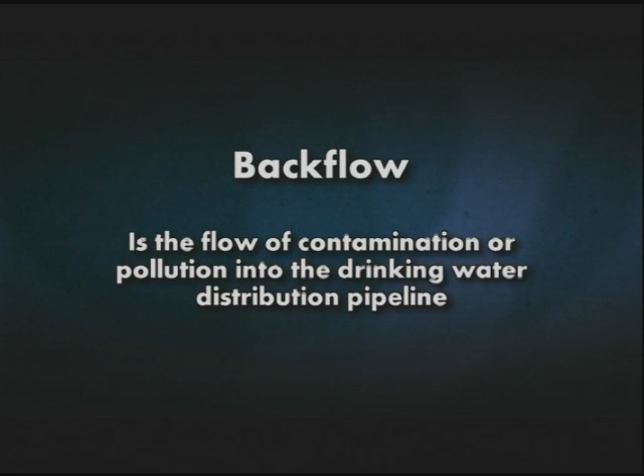Backflow is the flow of contamination or pollution into the drinking water distribution pipeline. Backflow can be caused by backsiphonage or back pressure.

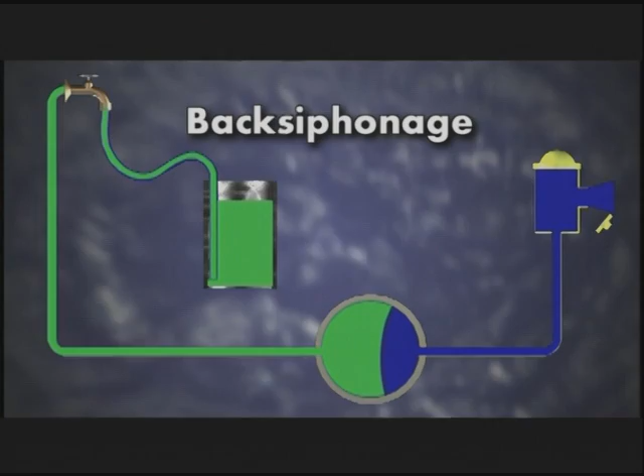Backsiphonage is caused by negative or reduced pressure in a water system and occurs during low-pressure events such as a line leak. Back pressure is caused when a potable water system is connected to a non-potable supply operating under higher pressure that pushes contaminated liquid back into the public water system.

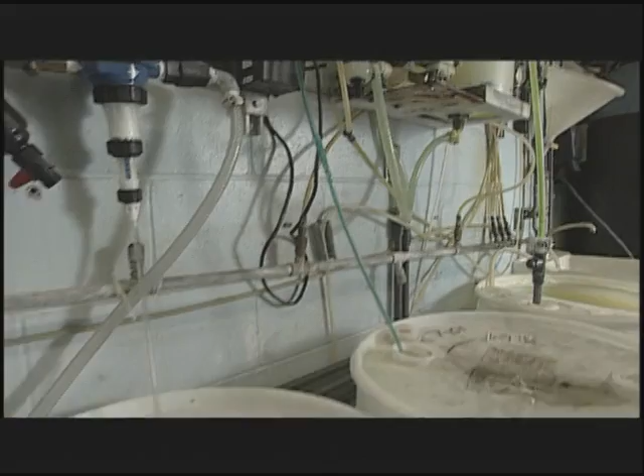This means that non-drinkable water or other fluids can accidentally get into your drinking water system. This occurs when there is a difference in pressure that forces the unwanted liquids into clean drinking water lines.

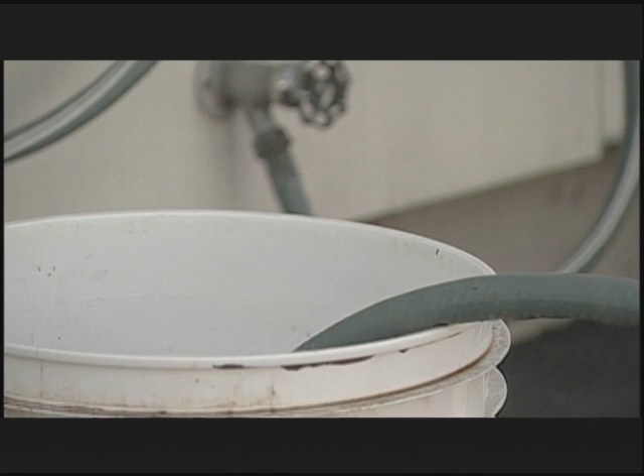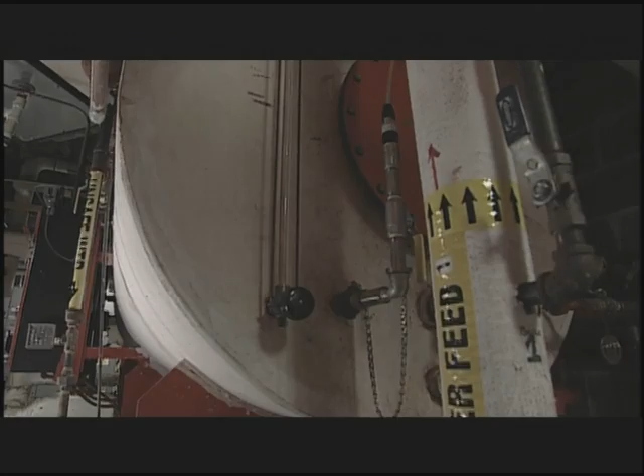Cross-connection, which is any actual or potential connection between the public water supply and a source of contamination or pollution, can occur at any connection location: residential, commercial, industrial, and agricultural. The public should be aware of the physical interconnections between the drinking water plumbing and potential contaminants. Let's look at some examples of how this might occur.

The employee at the car wash connects a 2-inch hose as a stopgap until the pump could be fixed. The pump was quickly repaired and turned on, but they forgot to disconnect the temporary hose. The pump forced the contents of the 2 reclaimed tanks, 850 gallons, into the drinking water main.

It didn't take long before a car wash employee noticed brown soapy water in the restroom. The cross-connected 2-inch hose was immediately removed, but not before contaminating an 8-block area. The water mains were flushed and chlorinated by the water department. A reduced pressure principle backflow prevention device was ordered installed on the water service pipe to provide premise isolation.

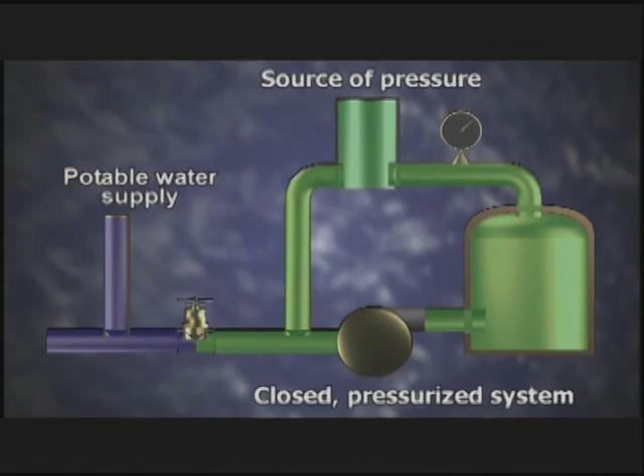As you can see, back pressure occurs when the pressure of the connected system exceeds the pressure of the drinking water system. The higher pressure could force the water to reverse its normal flow, allowing contamination in the drinking water system.

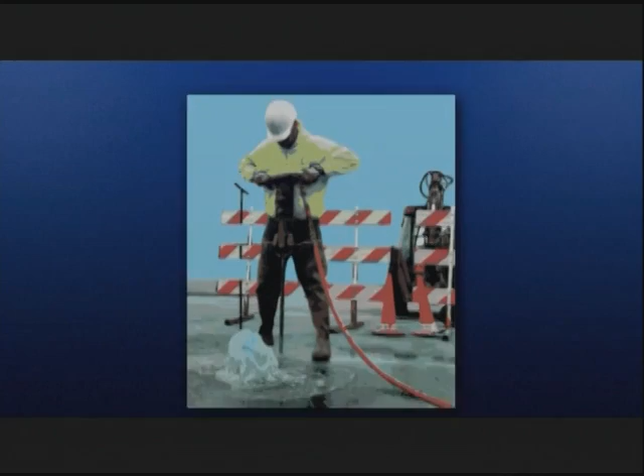In the second illustration, we'll see a different problem. In this example, a work crew accidentally cuts a water line, while at the same time a farmer, some distance away, is diluting a mixture of herbicides, weed killer, and pesticides with a water hose in a 300-gallon spray tank. The break creates a siphon or vacuum that sucks the chemicals back into the water system through the farmer's hose, and very obvious problems for the local utility or water provider.

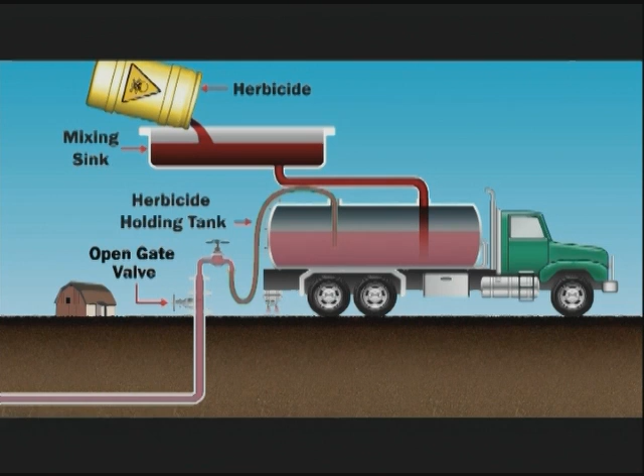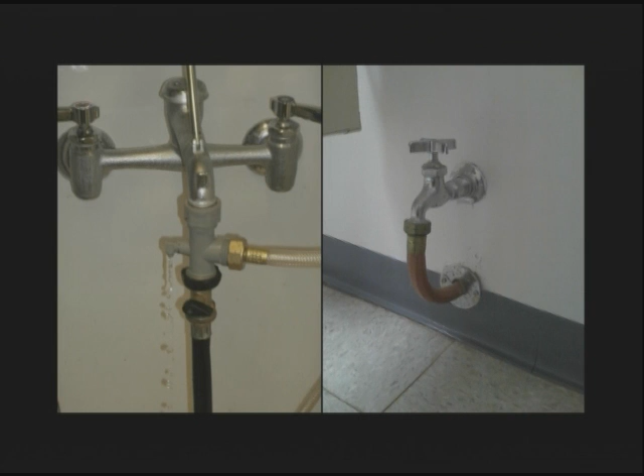So how can you protect your drinking water? Never leave a hose attached to a faucet that doesn't have a hose bib vacuum breaker or an air gap. Air gap is the safest and simplest way to prevent a cross-connection by a physical separation between a potable water source and a potential contamination.

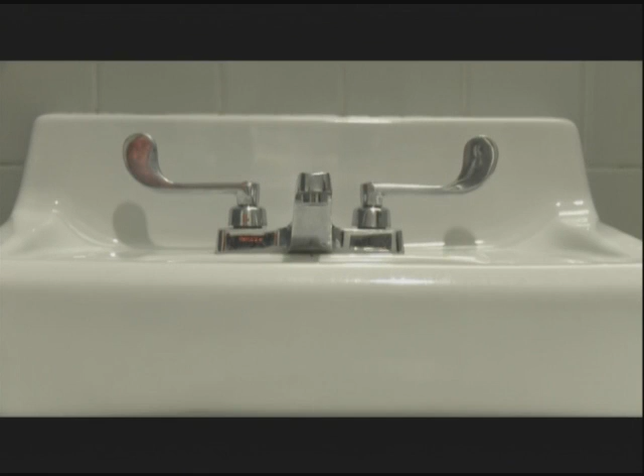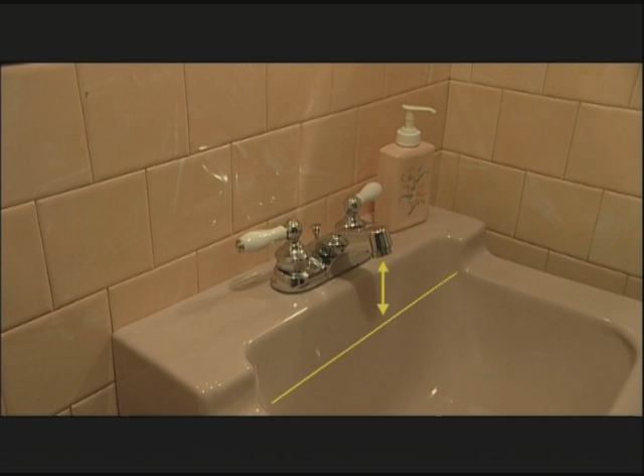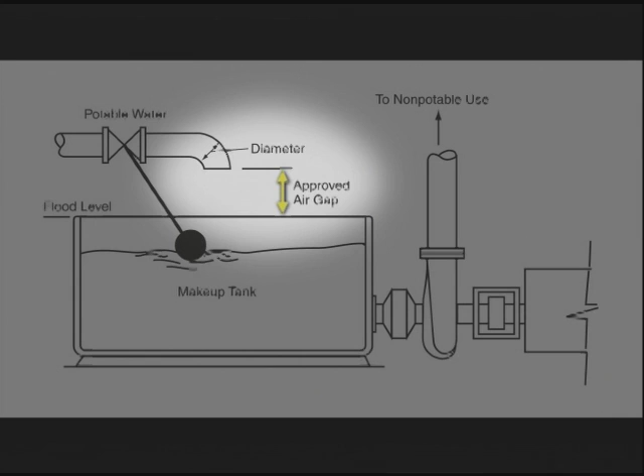In general, the air gap must be twice the supply pipe diameter, but never less than 1 inch. An air gap is not a device. Rather, it is simply physical space. An air gap may look like this, or this. The most common place you see an air gap is in a kitchen and bathroom.

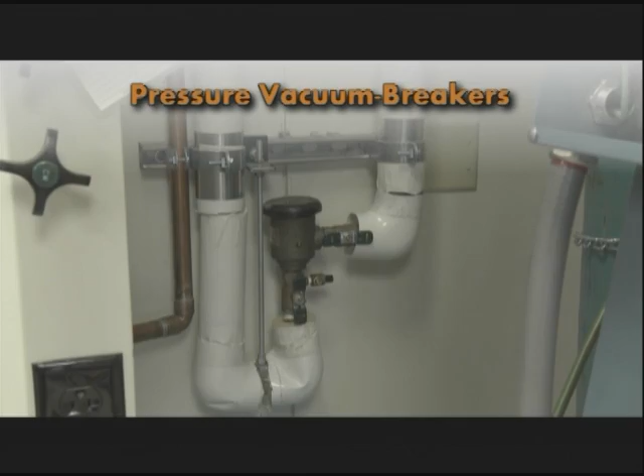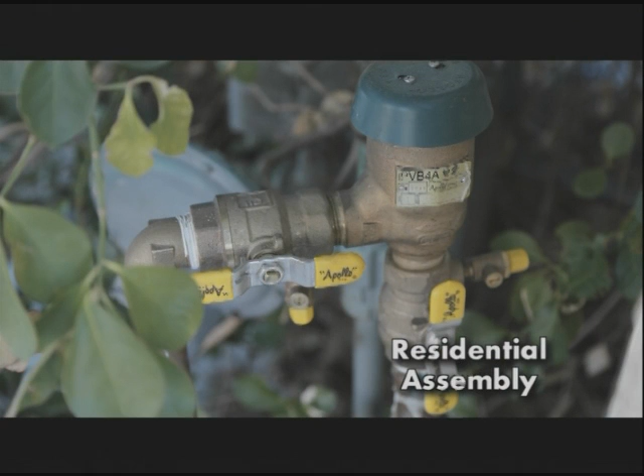Pressure vacuum breakers are designed to prevent back siphonage or water being drawn back into a water supply when the line is closed. These assemblies should not be used to prevent back pressure. The assembly opens to the atmosphere, thus preventing a vacuum in the line. The American Water Works Association recommends all testable backflow preventers be tested annually.

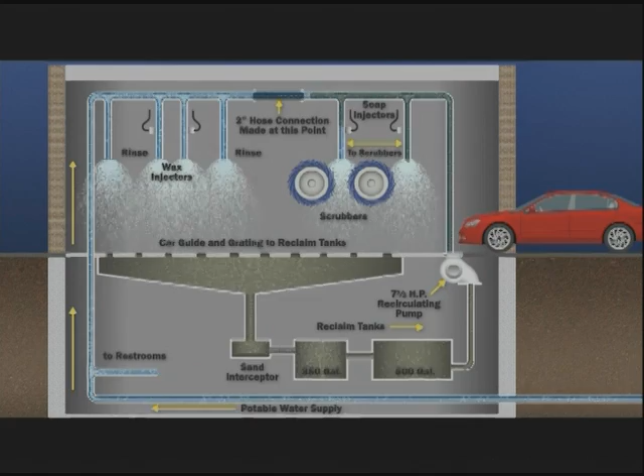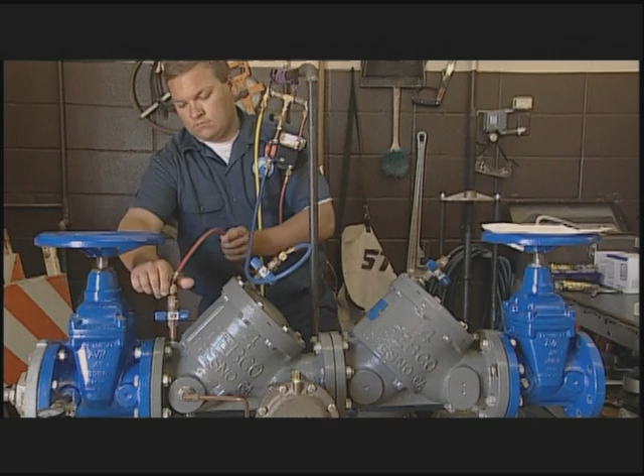And if you have any questions, you can contact your drinking water service provider, state drinking water program, health department, or a professional certified plumber. So, as you can see, backflow prevention really is a two-way proposition, with both the water service provider and the water service user sharing important responsibilities. Preventing backflow problems really is everyone's responsibility because safe drinking water is everybody's business.